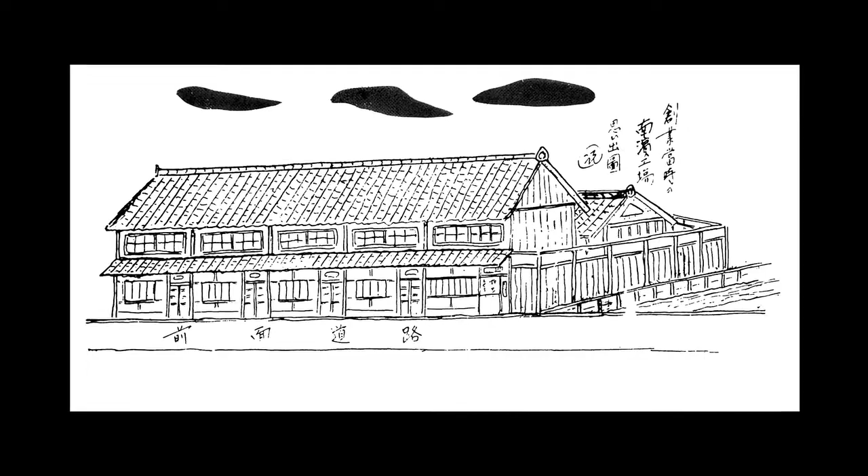It was 100 years ago when Setsuzo Tsubakimoto founded a bicycle chain manufacturing company in Minamihama, Osaka. This was the moment of Tsubaki's birth. Tsubaki steadily increased its production. However, the price of bicycle chains plummeted.

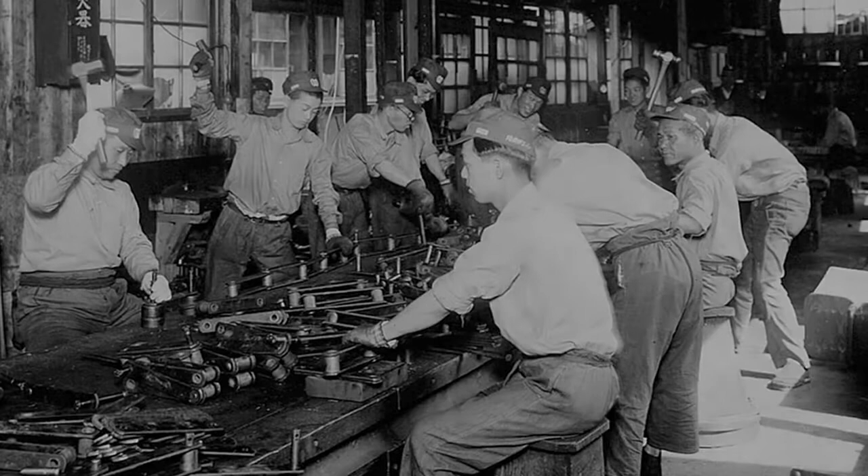In those days, most chains for industrial machinery were made overseas. This is where Setsuzo saw the future. Tsubaki stopped production of bicycle chains after just 10 years and shifted to chains for machinery.

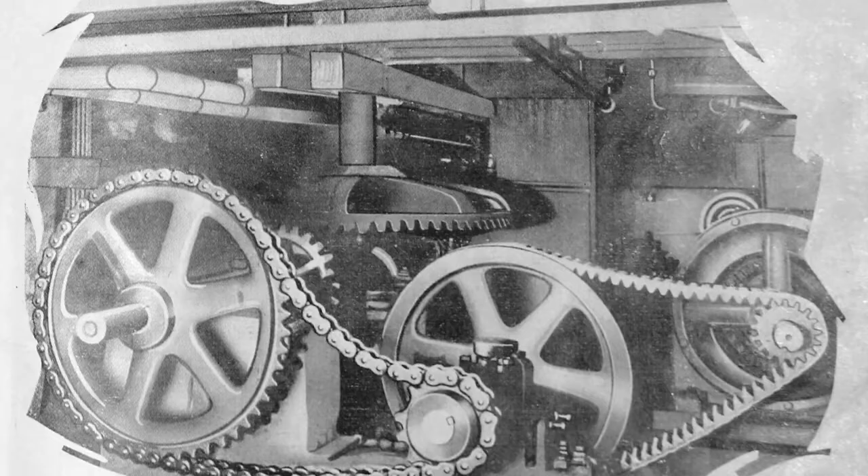Power transmission chain and conveyor chain. Starting first with chains that convey goods, Tsubaki also tried its hand at manufacturing large-scale cement conveyors that utilize chains. This was the beginning of Tsubaki's materials handling operations.

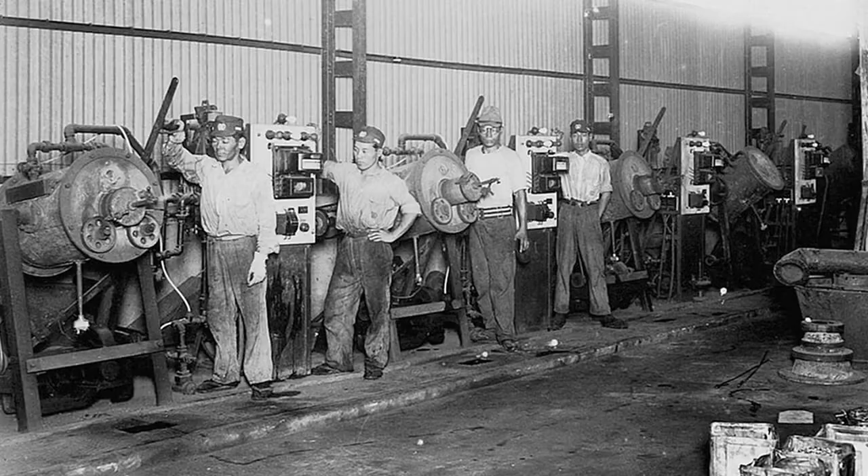Tsubaki wanted to catch up with and overtake global chain quality. In 1940, Tsubaki constructed a plant in Tsurumi, Osaka. Later, Tsubaki's growth mirrored the explosive post-war growth of Japan.

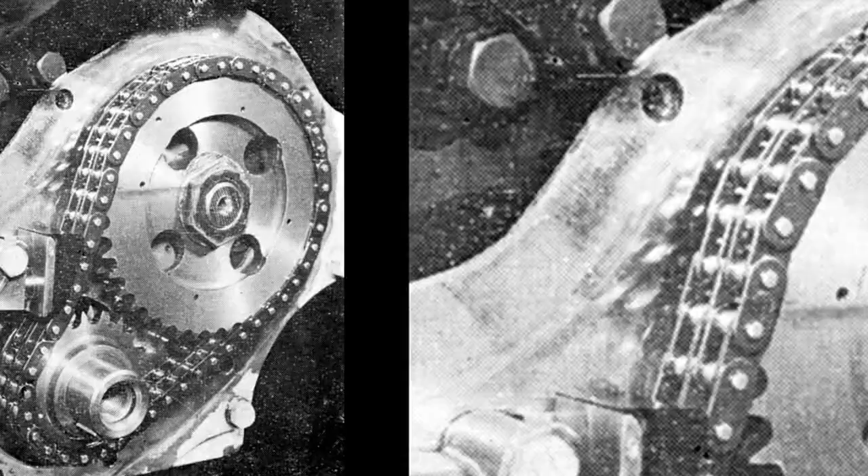Tsubaki released timing chains, specialized power transmission chains for automobile engines, and reducers that utilized chain. This marked the dawn of Tsubaki's automotive parts and power transmission units and components operations.

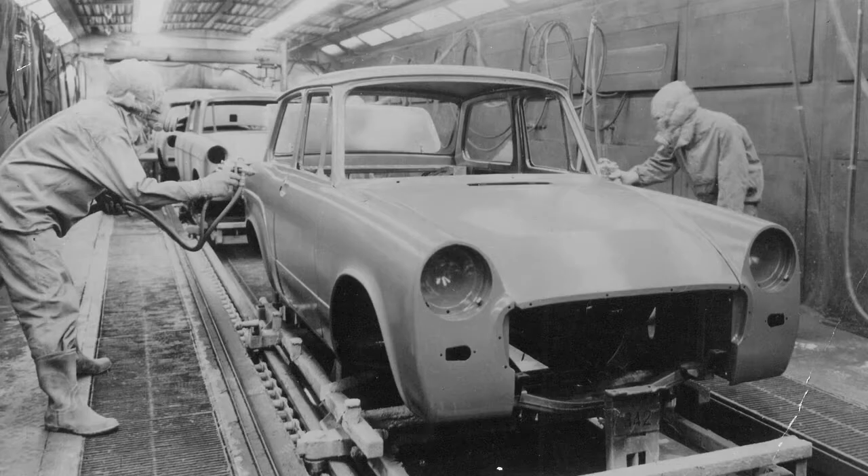In 1962, Tsubaki made headway in eastern Japan. Tsubaki's materials handling systems operations made a big leap with the completion of the Saitama plant. In 1968, Tsubaki established its first overseas base in Taiwan.

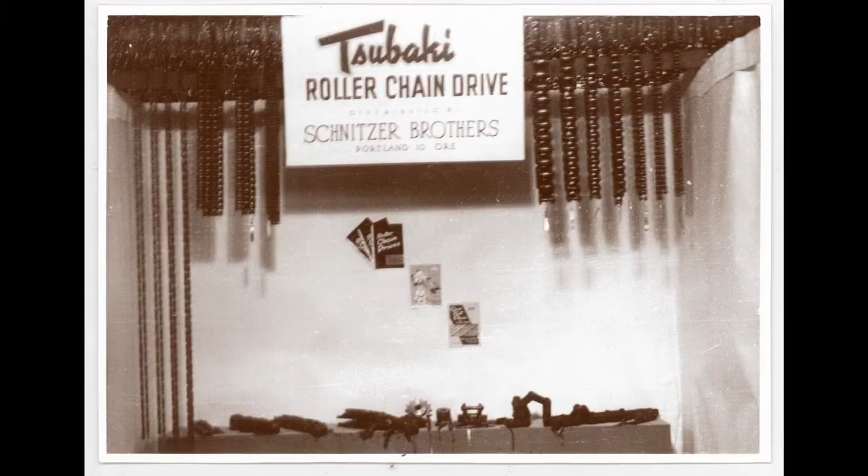Then, in 1971, Tsubaki established a sales company in the United States. It was Tsubaki's next big step after having first started exporting chains to the United States 20 years earlier. Tsubaki built its own sales network without involving trading companies.

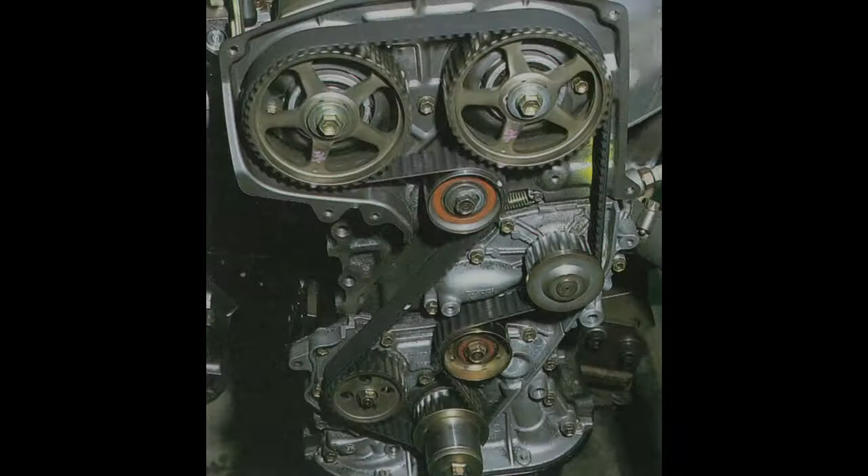Later, Tsubaki continued expanding its overseas bases into Canada and the Netherlands. In the 1980s, there was a sudden shift from chains to belts used in the timing drive systems of automobile engines.

But Tsubaki never gave up and went on to develop a lightweight, quiet timing chain. It's this spirit of determination that led to the global adoption of timing chains seen in automobile engines today.

In 1986, Tsubaki started locally producing chains in North America. And then in 2001, Tsubaki completed construction of its Kyotanabe plant.

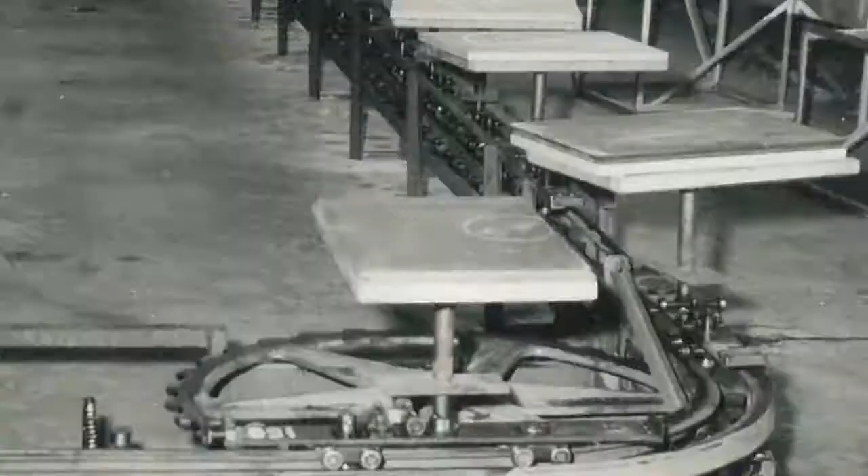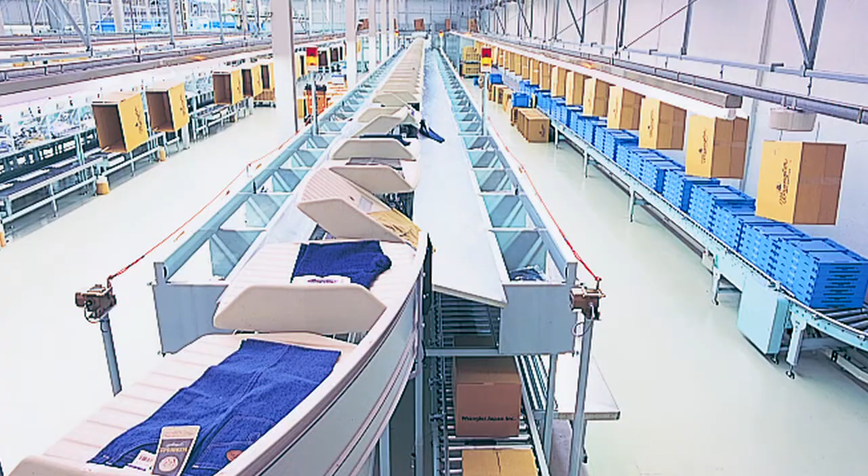Tsubaki never rests on its laurels and is never afraid of taking on new challenges. Tsubaki's determination continues to be seen today, and its 4 operations drive industries around the world.

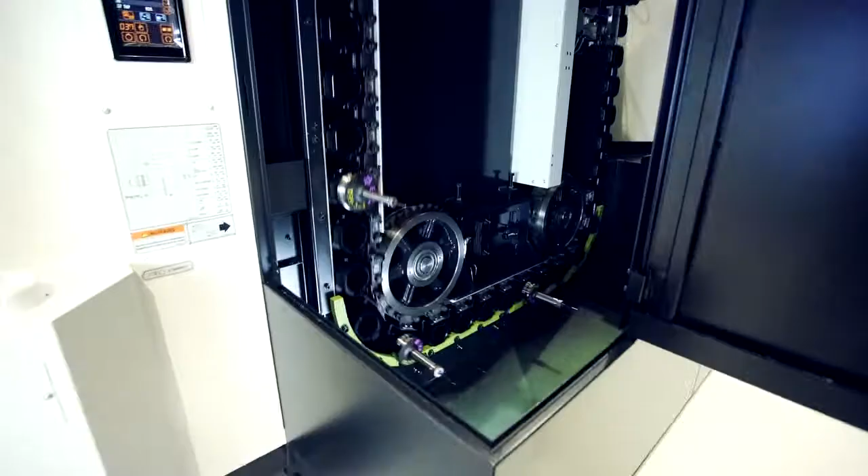Chain operations, power transmission units and components operations, materials handling operations, automotive parts operations.

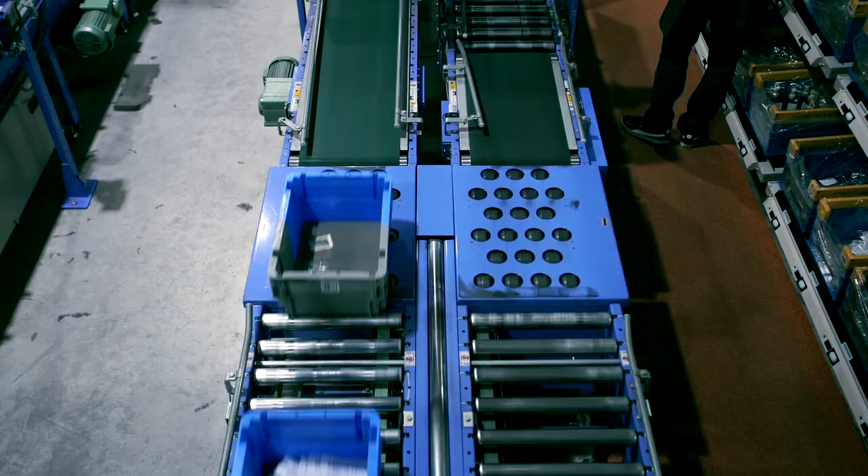Tsubaki has continued to develop new products in these 4 areas. And then there's Tsubaki's new business areas that will drive the future.

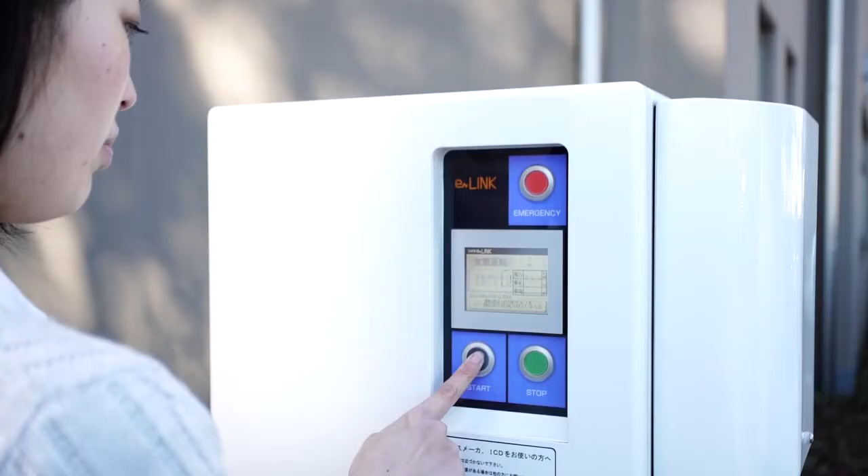Tsubaki's E-Link system controls stored power. Tsubaki's agricultural business develops state-of-the-art vegetable cultivation equipment. Tsubaki's Mitamon is a remote monitoring platform supporting IoT.

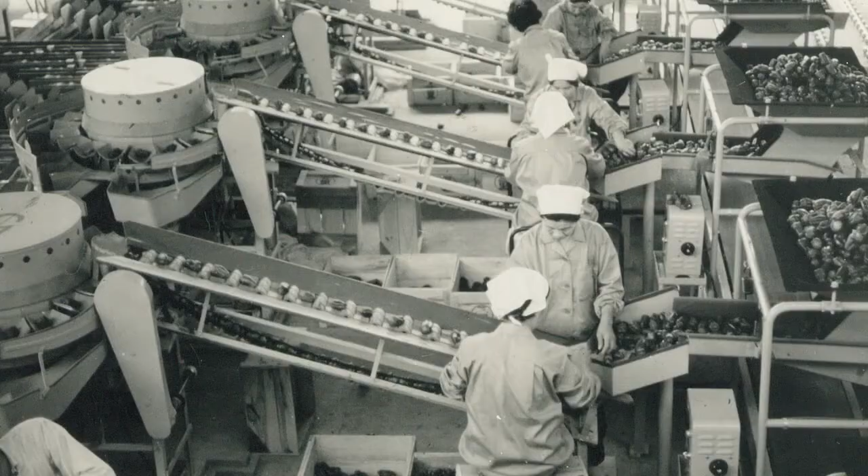Together with our network of group companies, Tsubaki's technological prowess and determination cultivated over the past 100 years are now being expanded to countries worldwide. Currently, Tsubaki has 77 bases in 26 countries.

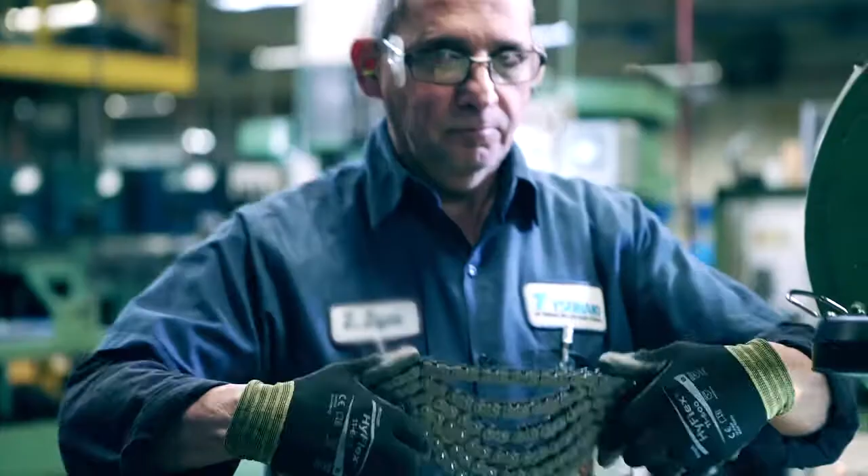We are manufacturing specialists that take the art of manufacturing to new heights beyond the expectations of society. With appreciation for the past 100 years, Tsubaki will continue to innovate and take on the next 100 years.

Driving the world and the future. Tsubaki.